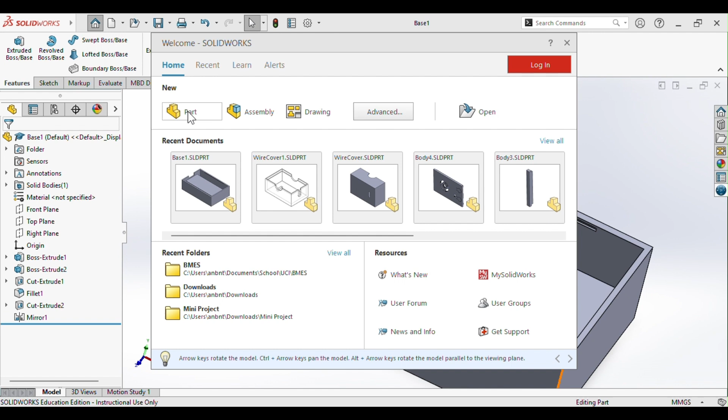Hi everybody, this is a SolidWorks walkthrough of the temperature probe we're building as part of the BMES mini project series of winter quarter. We'll first create a part file and then at the bottom right corner make sure that it is in MMGS, or millimeter.

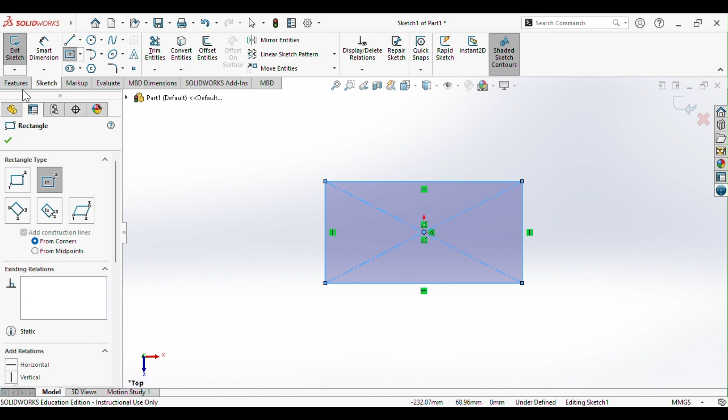The next thing to do is to click on the top plane and create a sketch, and then use the center rectangle tool starting at the origin to build your rectangle. Then using the smart dimension tool, select an edge and then change the dimensions as seen here in the video, and then you'll do that for both of the edges of the rectangle.

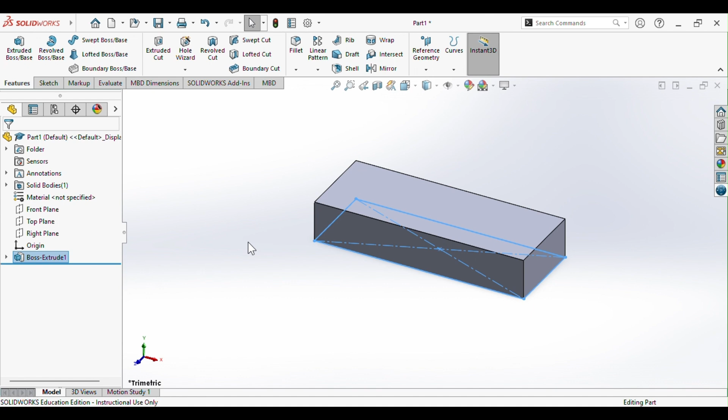Once your rectangle is fully defined, change into the Features tab, select Extrude Boss Base and change the value to 10 millimeter. Once you extrude, click on the scroll wheel of your mouse and then go to the bottom face of this rectangle, go into Sketch, and create another center rectangle starting from the origin, going out. Use the Smart Dimension again to define the edges of your rectangle.

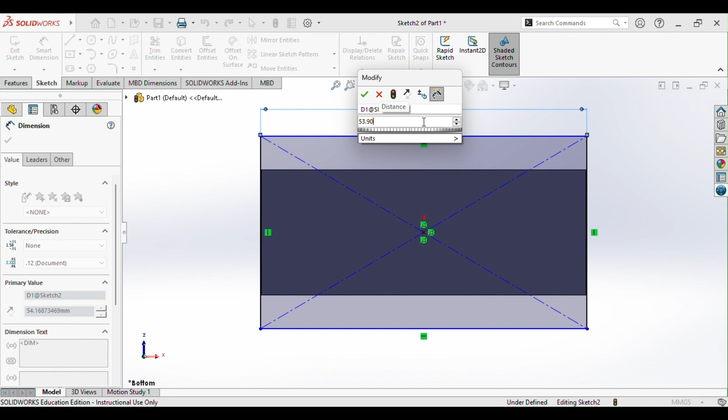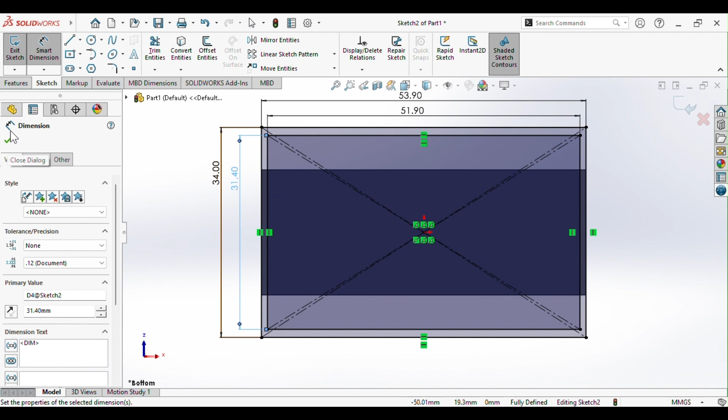Then in the same sketch, use the center rectangle tool again, centered at the origin, to create another rectangle for a total of 2. And then use the Smart Dimension tool to define it as seen in this video. Go into the Features tab and again use the Extrude Boss Base tool. Make sure that the direction of your extrusion is correct by clicking that arrow and then change the dimension.

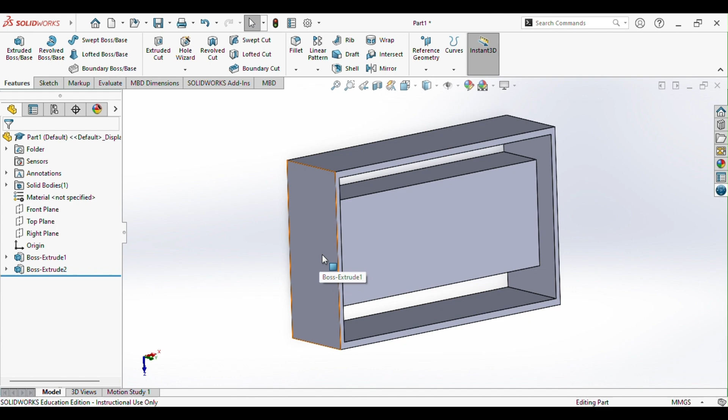Using your scroll wheel to rotate, select the face as seen in this video and then click on Sketch, and using the corner rectangle tool create a rectangle that is coincident or touching the top edge as seen, and then use the Smart Dimension tool to define your rectangle.

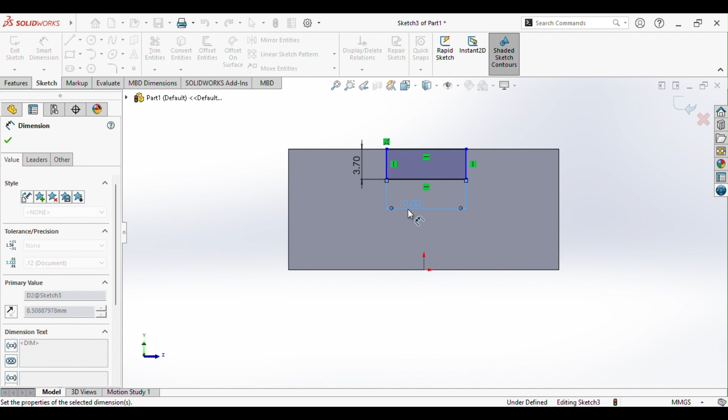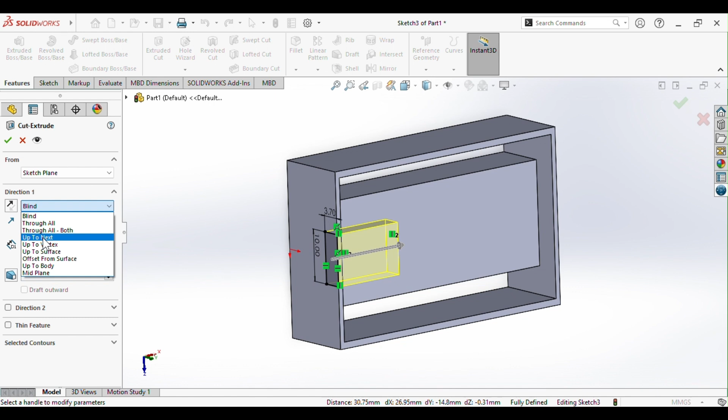Now we want to make sure that the rectangle is fixed to the center, so what we'll do is exit out of Smart Dimension and then right click on that top edge of the rectangle, select midpoint, hold Control and select the origin, click vertical to add relation and your rectangle should be fixed. Then go into the Features tab, select Extruded Cut and select up to next for the option of cutting through.

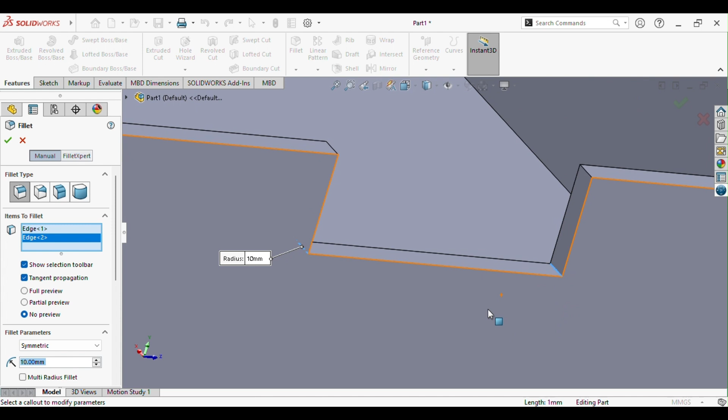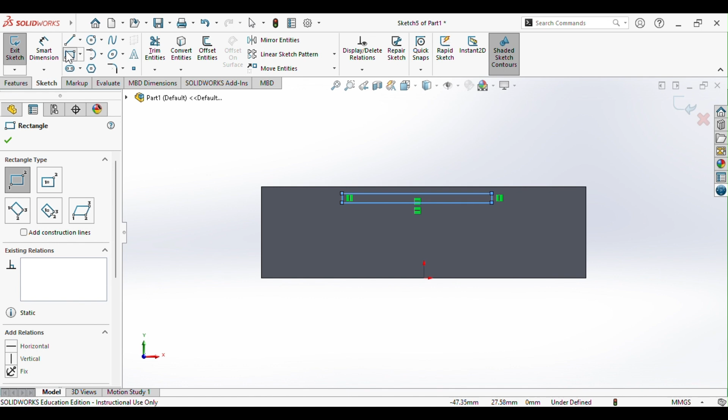Then we'll use the Fillet tool in the Features tab to round out the corner of the rectangle we just cut out, and we'll select on the corner and change the amount to 0.5 millimeter. Using your scroll wheel to rotate, select the face as shown in the video and create a rectangle using the corner tool. Use Smart Dimension to define the width and length of the rectangle.

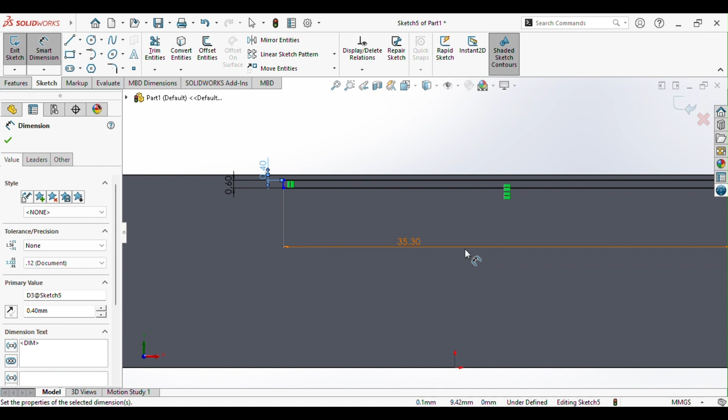And then select the top edge of the rectangle with the top edge of the larger box, and set that to 0.4 millimeter. Exit out of Smart Dimension, right click on that top edge, select midpoint, and then hold Control while selecting the origin, then click vertical in order to fix our rectangle. Using the Extrude Cut tool, we'll change the type to blind, and then set our value to 0.4 millimeter.

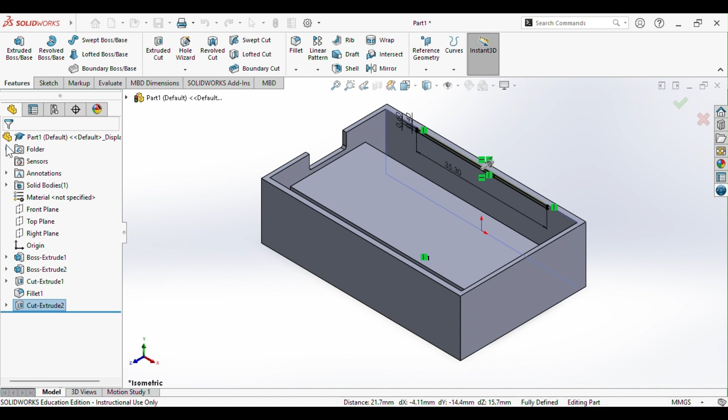Left click the Cut Extrude feature, Mirror. For Mirror Face/Plane, click the drop down menu and select the front plane as what we'll be mirroring across.

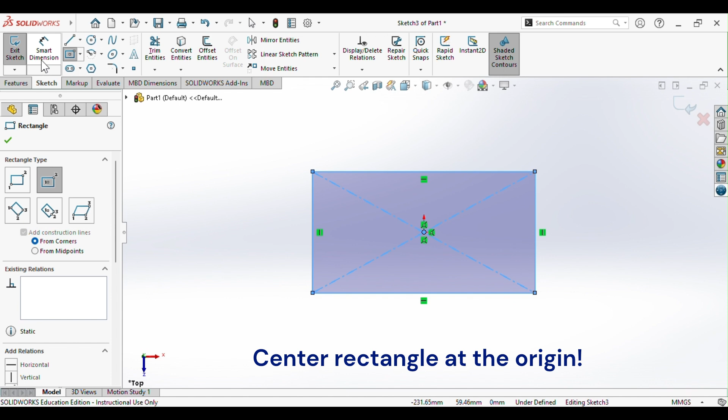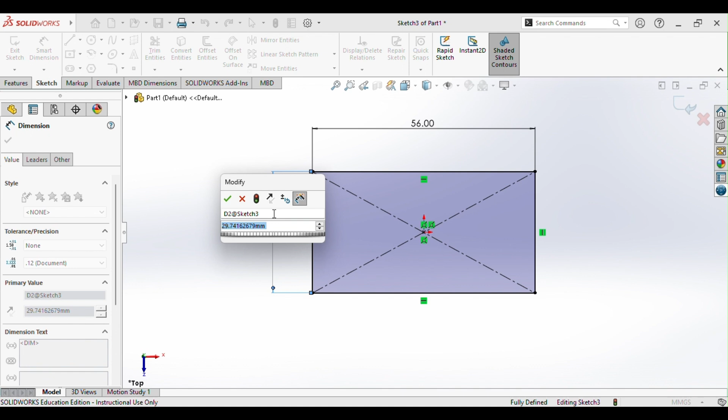Create another part in MMGS and use the center rectangle tool on the top plane to create our rectangle. Then use the smart dimension to define it as seen in this video. Use the extrude boss base feature to extend our rectangle to 23 mm.

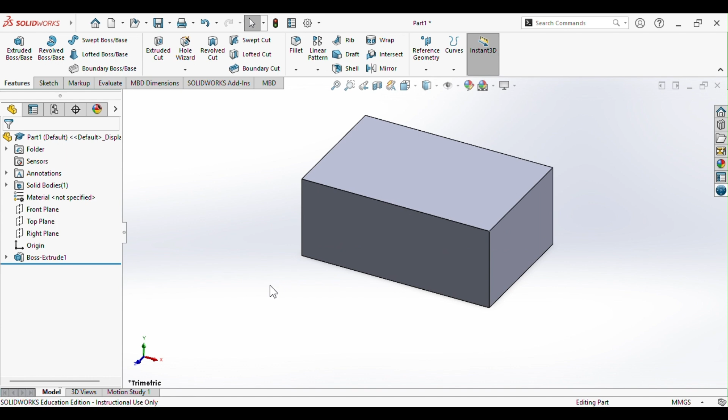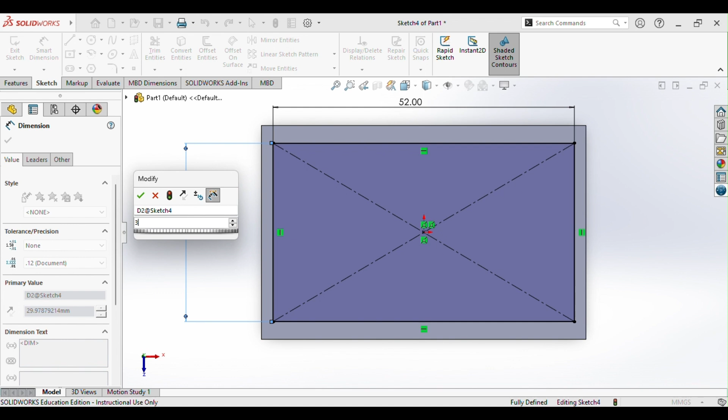Select the top face of this box for our next sketch. Use the center rectangle tool centered at the origin to create a 52 by 32 mm rectangle. Use the extrude cut feature in order to cut into our rectangle. Make sure that it is facing the correct way by selecting that arrow as seen in the video and changing the value to 20 mm.

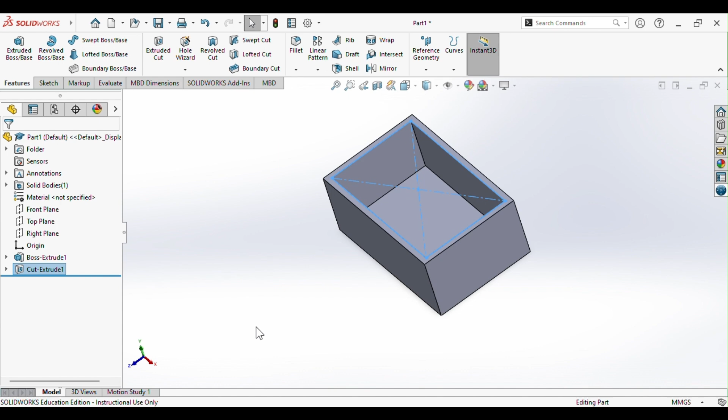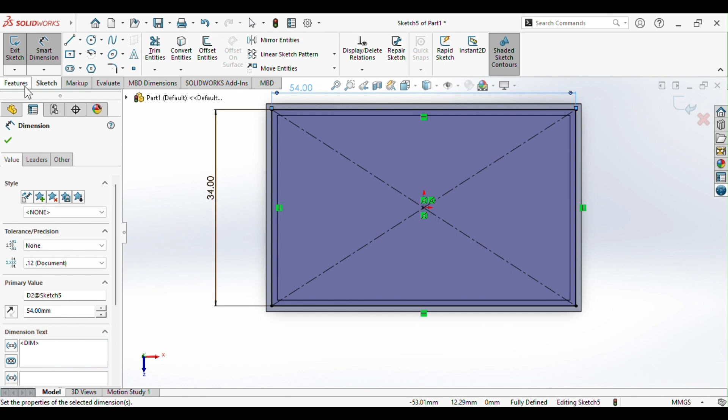Again, we'll select the top face of our box to create another sketch. Use the center rectangle tool centered at the origin to create another rectangle and define it as usual. We'll use the extrude cut feature on the sketch that we just made and change that value to 3 mm.

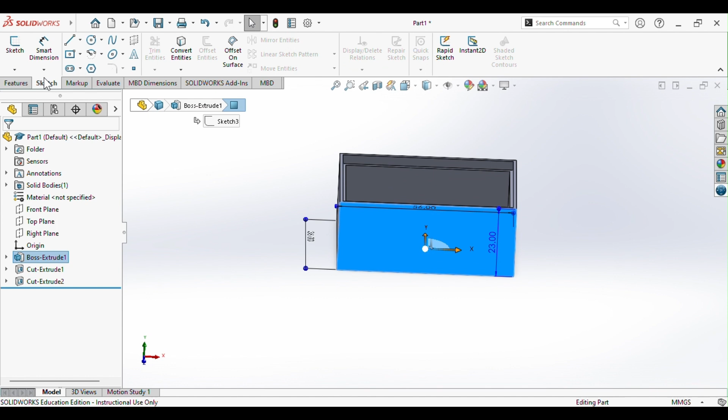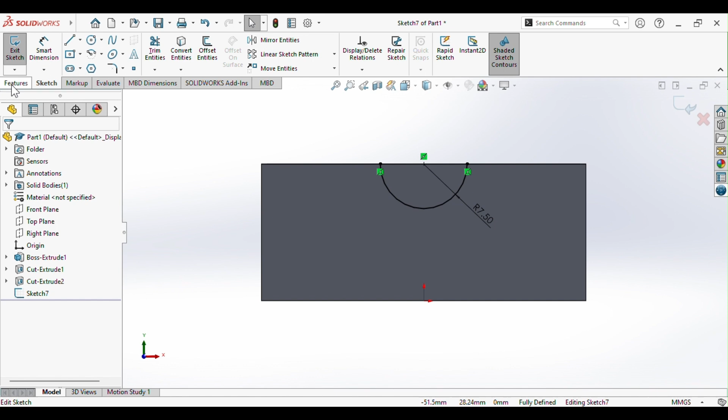We'll select the face as seen in this video for our next sketch and use the center point arc for our semicircle. Click on the midpoint of our rectangle as the center of our semicircle. Go to the left to create the radius and then click an arbitrary amount. Then use the smart dimension tool to define the radius, and we will use the extrude cut feature to cut through all for this shape.

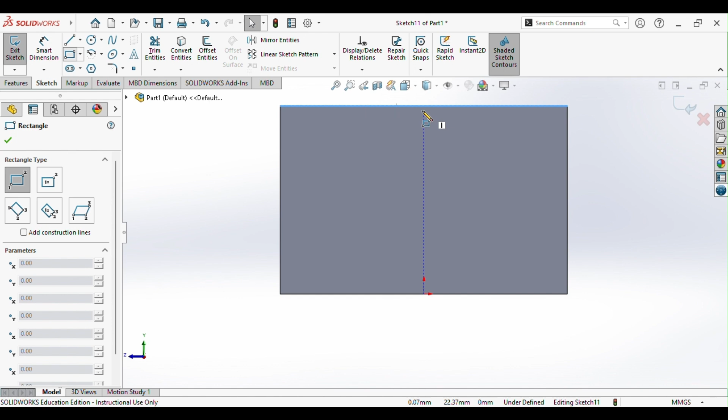Select the face as seen for our next sketch. Use the corner rectangle tool to create a rectangle that is coincident with the top, or touching the top. And use the smart dimension tool to define our shape. Exit out of smart dimension while still staying on our sketch. Right click the top edge of the smaller rectangle, select midpoint, and select the origin point to create a vertical relation.

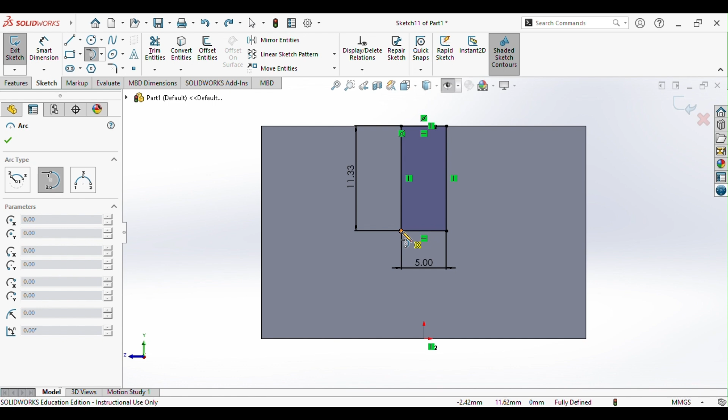Use the tangent arc tool to create a semicircle, then go into trim entities, hold down on your left click, and get rid of that line between the rectangle and the semicircle. Use extrude cut blind at 2 mm to create our shape.

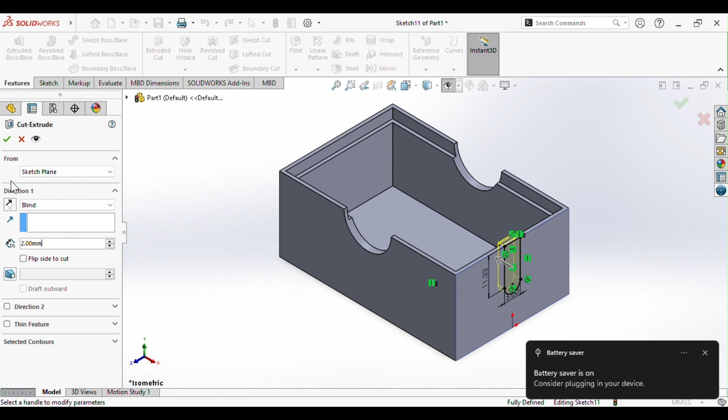Use the scroll wheel to select the bottom face of the box for a sketch. Using the corner rectangle tool, create a rectangle and smart dimension it as 10.50 by 3 mm.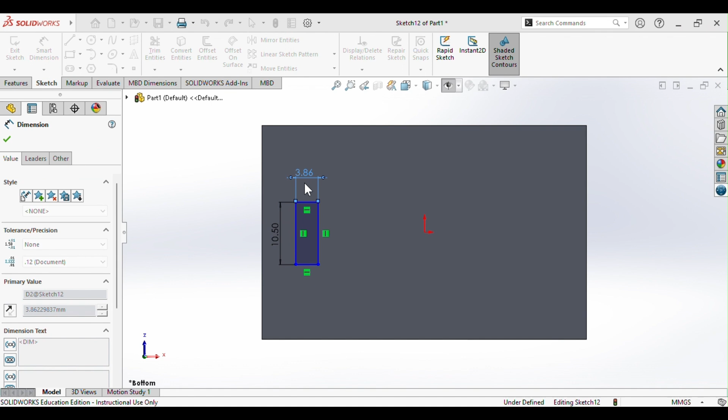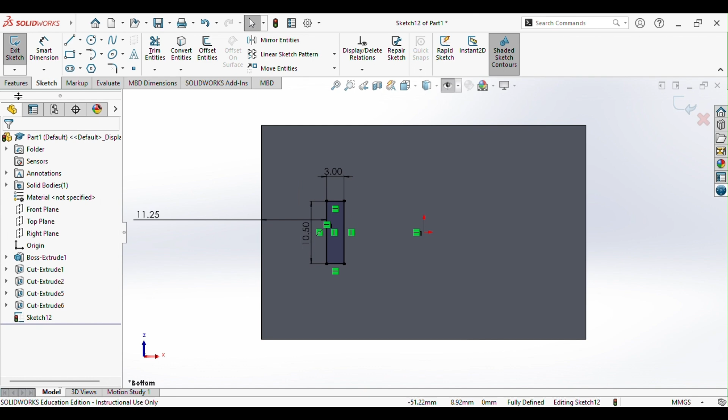Right click on the left edge, select the midpoint, and select the origin point to create a horizontal relation. We'll smart dimension the left edge of this new rectangle with the left edge of the box as 11.25. Create an extruded cut of this sketch all the way through the box.

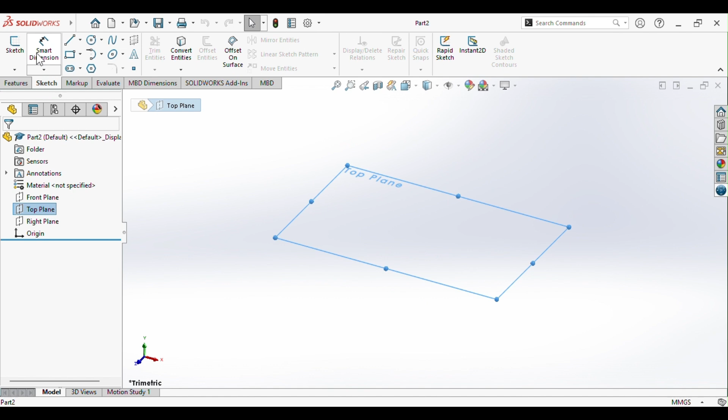Create another part in MMGS and use the center rectangle tool on the top plane to create our rectangle, then use the smart dimension to define it as seen in this video.

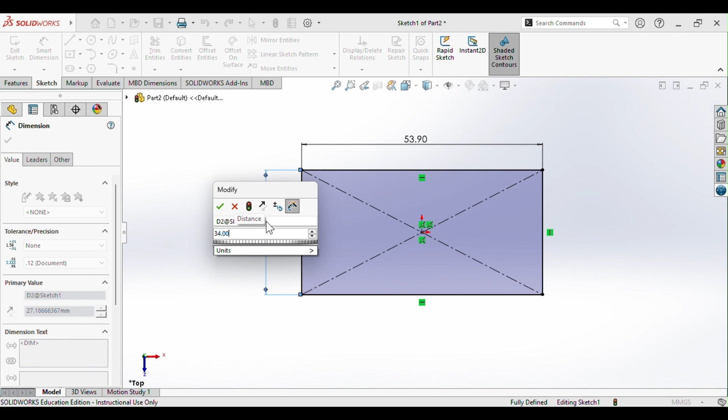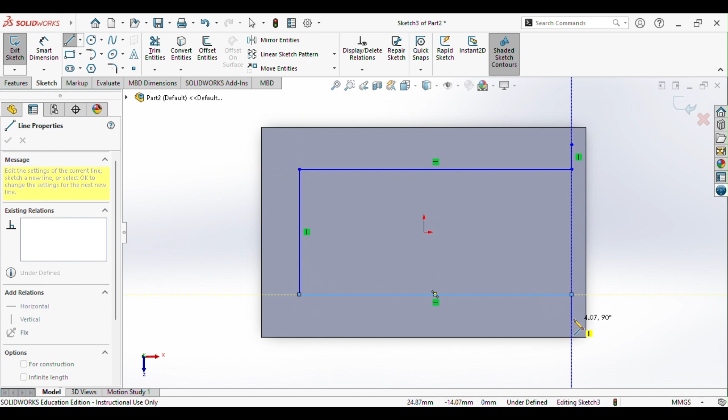With the sketch on the top face of this rectangle, use the line tool to create a C shape as seen, and make sure that all your lines are snapped perpendicular and parallel to each other. Hold Ctrl while selecting the corresponding lines for this section and add the equal relation.

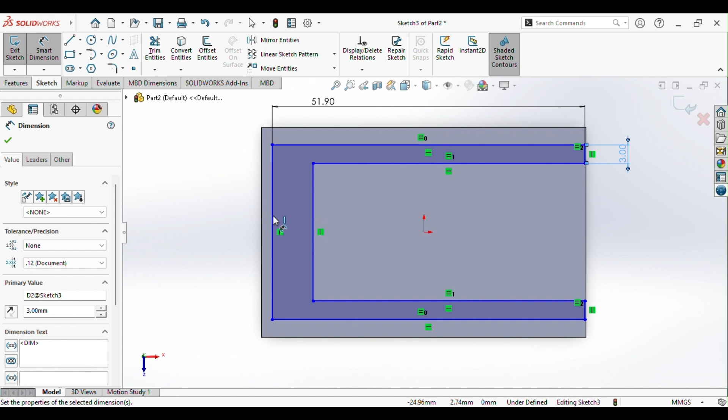Use Smart Dimension to define the very top line as 51.90 mm, the very right side as 3 mm, the most left side as 31.4 mm, while the inner vertical line is 3 mm away from the left vertical line.

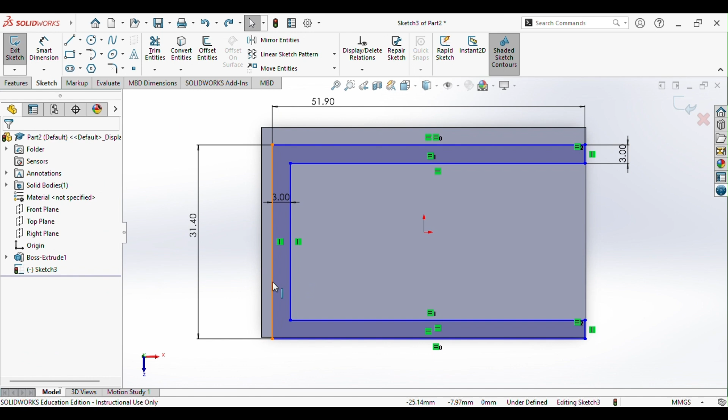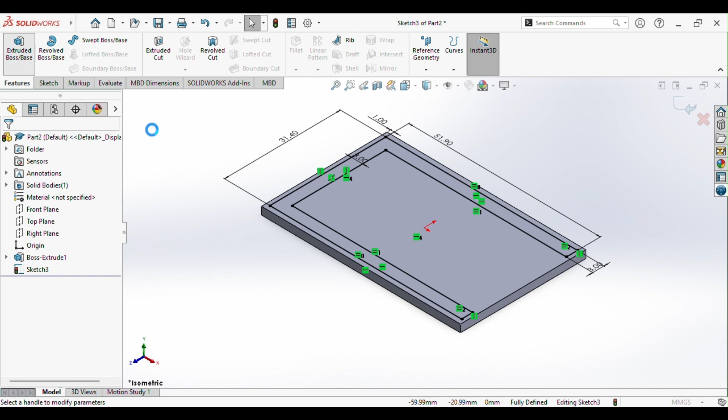Exit Smart Dimension, right-click on the inner vertical line to select midpoint, and hold Ctrl to select the origin to create a horizontal relation. Smart Dimension the left line of the C shape to the left line of the box as 1 mm. Extrude the sketch by 1.5 mm.

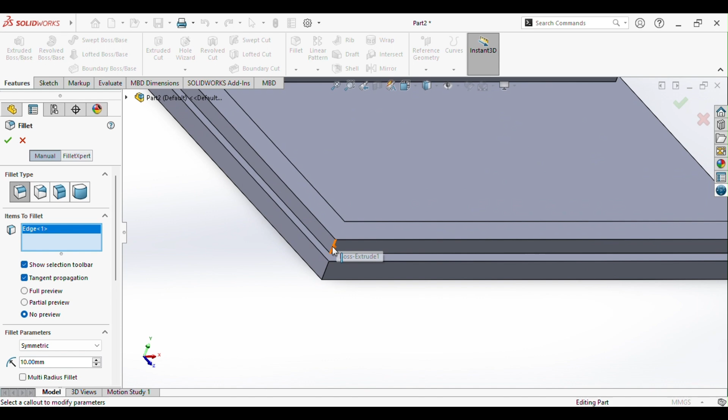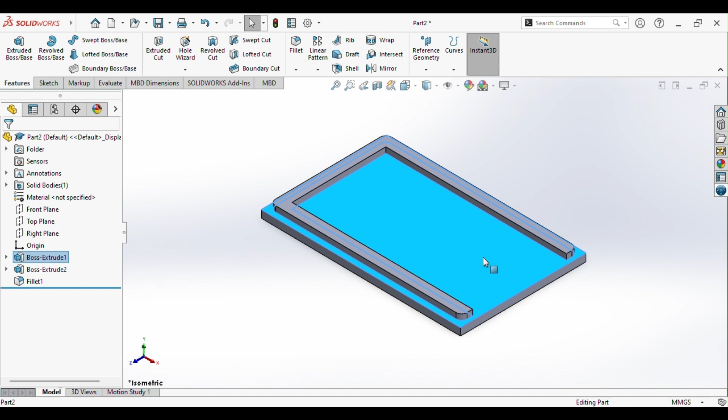Using the fillet tool, select the corner edges as seen and add a radius of 1.5 mm. With a sketch on this top face, we will create a corner rectangle that is 3 mm by 4.6 mm and have it be 12.5 mm from the right edge and 9 mm from the top edge.

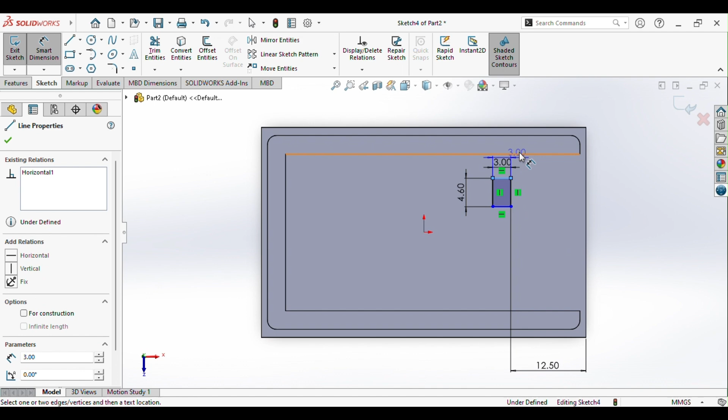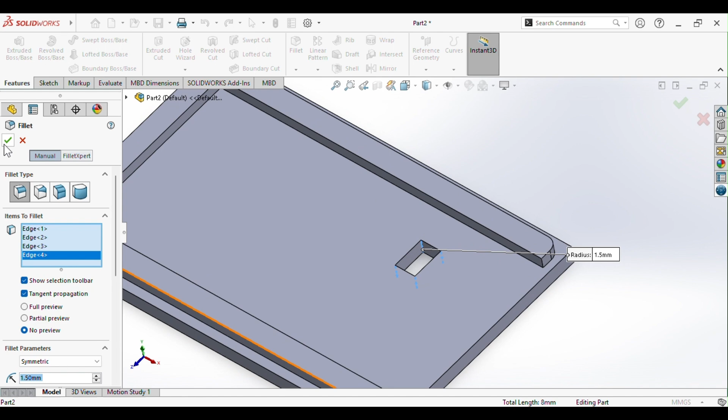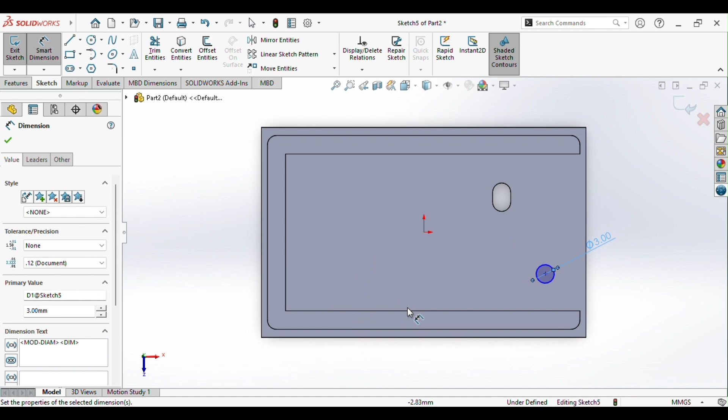Then use the cut extrude feature to cut all the way through and add a fillet of 1.5 mm to the inner corner of this rectangle. With a sketch on this face, create a circle that is 3 mm in diameter and is 10 away from the bottom edge, while it is 5 mm away from the right edge. Extrude this out by 1.5 mm.

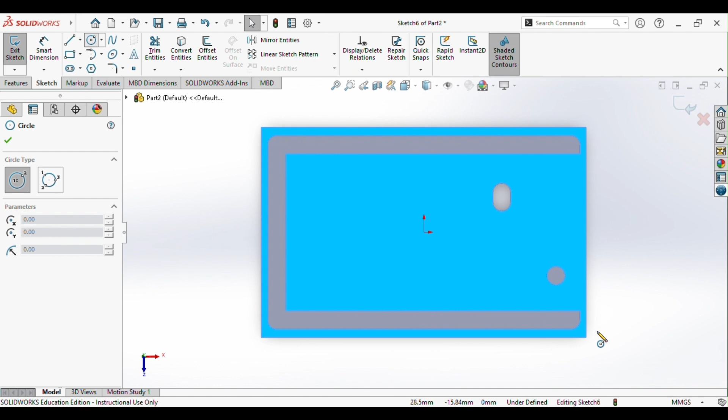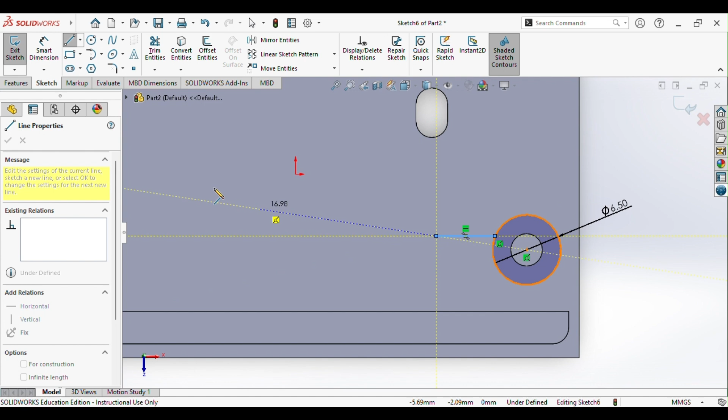Create another sketch, this time adding a circle that is centered with the circle we last created, then make the diameter 6.5 millimeter. From there, use a line tool, coincide it with the circle that we just made to some arbitrary length. Make sure that it is horizontal and press escape to stop using the tool.

Create another line that is parallel to that and also coinciding with the circle below. Then Control select the two lines and make them equal to each other with the relation. Define the lines as 2.5 millimeter. Control select the two dots that coincide with the larger circle and make them vertical to each other.

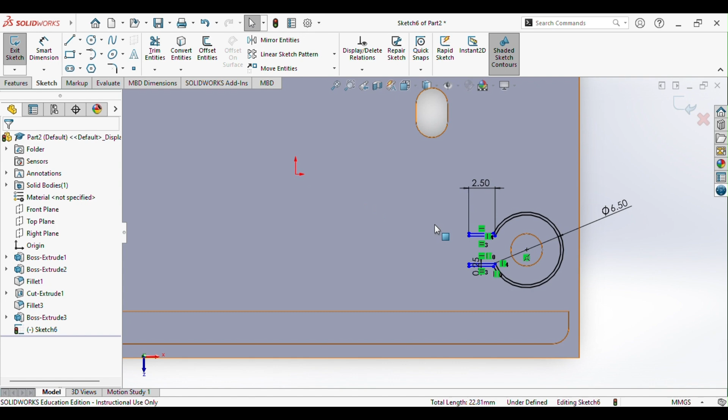Then Control select the three items that we just made and offset entity by 0.25 millimeter. As you can see, the lines are still not fixed, so we will select the point coinciding with the circle and set it to be 3 millimeter away from the center of the circle. Use the line tool to close off the shape. Then you can use the extrude cut tool to cut it all the way through the surface.

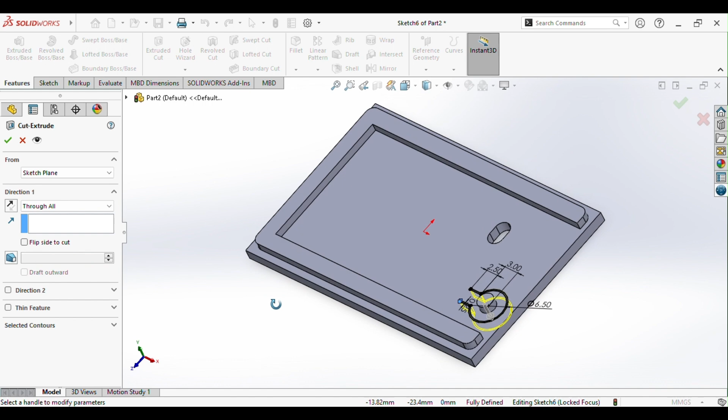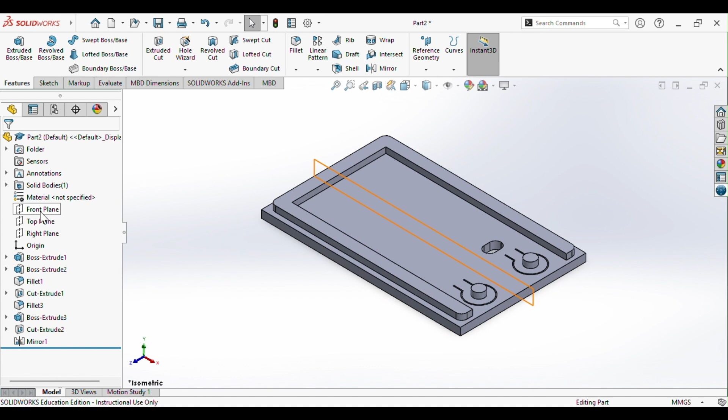Control select the last two features that we just made, ensuring that the features to mirror are correct. Then in mirror face / plane, select the drop down menu and mirror it across the front plane. To create a snap fit notch, we will select the right plane as our sketch.

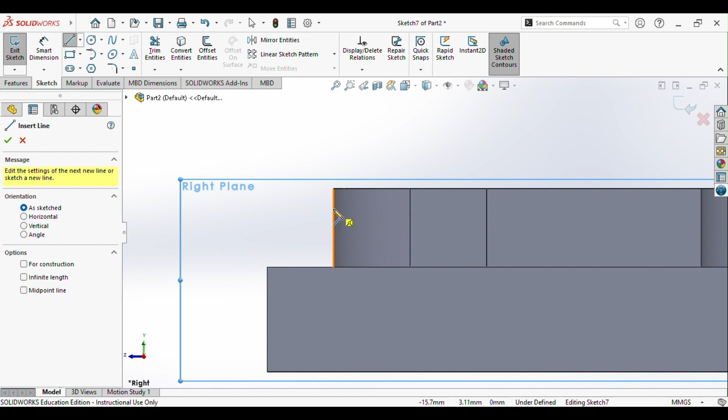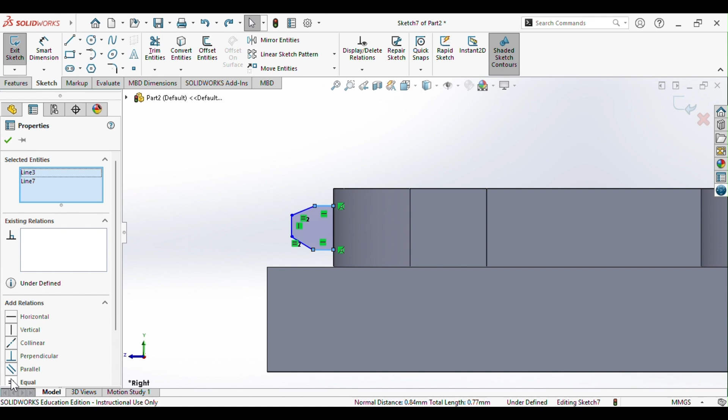And use the line tool coinciding with the surface to make this shape. Then Control hold the respective lines here to make them equal to each other. Using the Smart Dimension tool, the rightmost side of the shape will be 0.4 millimeter. The top section will be 0.18 millimeter.

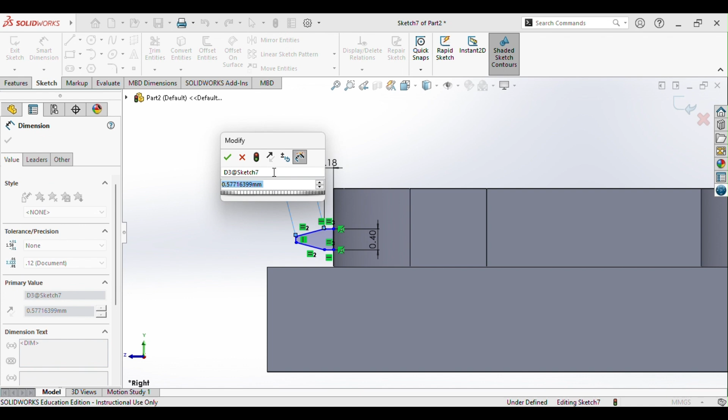This angled side will be 0.17 millimeter, and make sure that the Smart Dimension tool that you're using is angled correctly. This very left side will be 0.16 millimeter, and the very bottom edge will be 0.4 millimeter away from the top surface of that face right there.

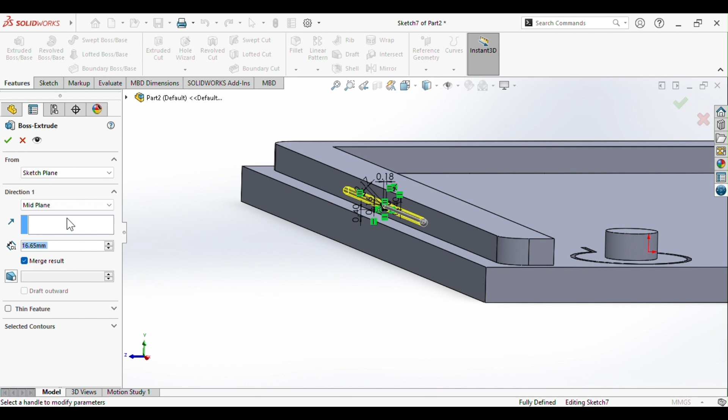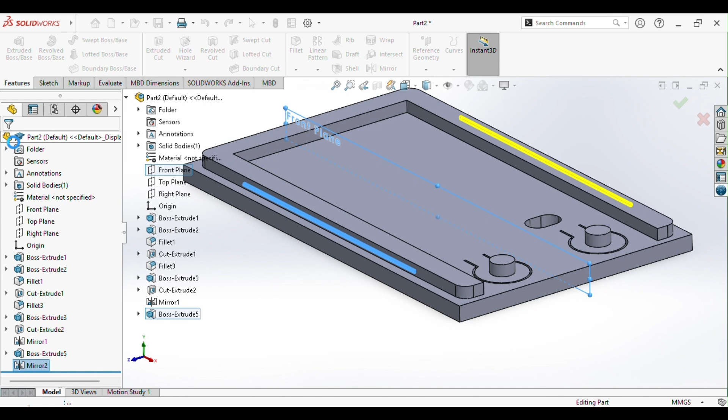Then go into Features, Extrude Boss Base, and we will select the mid-plane option, making our shape 33.30 millimeter long. Select the Boss Extrude feature that we just made and click the mirror option. For mirror face and plane, we will mirror this across the front plane.

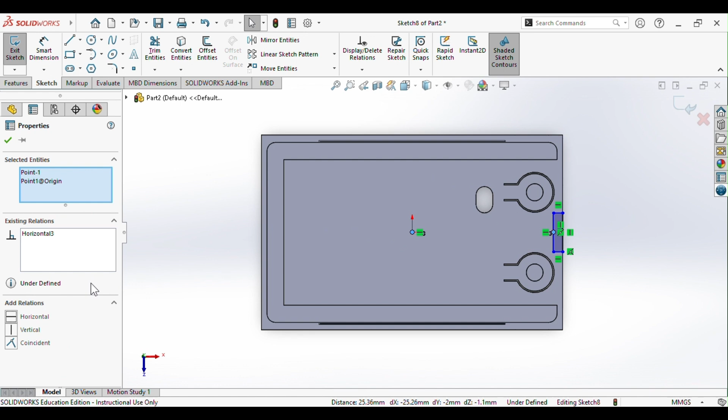The very last thing to do is to create this rectangle cutout. We'll use the corner rectangle tool to create a rectangle that is coincident with the right side of the shape. And then right-click the left edge of this rectangle, select midpoint, and select the origin to create a horizontal relation. Use the Smart Dimension tool to define this rectangle, and we'll extrude cut this rectangle in by 0.4 millimeter.